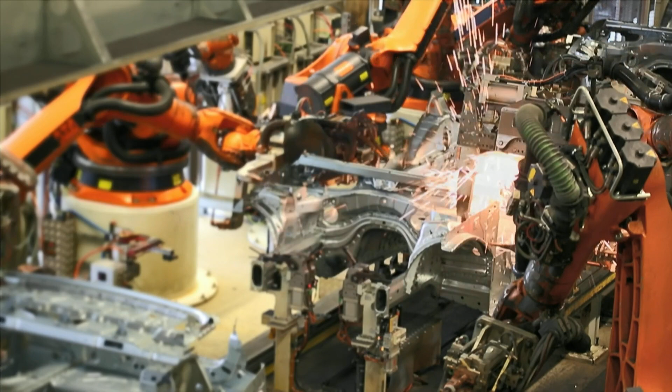We sort of know these factory robots. We've had them for a long time, and I'll talk about their beginnings. Robots in automobile factories is what the Robot Industry Association used to say robots were until fairly recently. There's only a few hundred thousand of them in the world. So these are the robots that populate factories, and there are no people next to them. They're all robots, no people, and I tried to fix that and made some progress over the last few years.

It's not actually a real baby, but that's another story. And then there's robot vacuum cleaners. iRobot has about 60% of the world market for them. But there's also military robots, and iRobot was part of that.

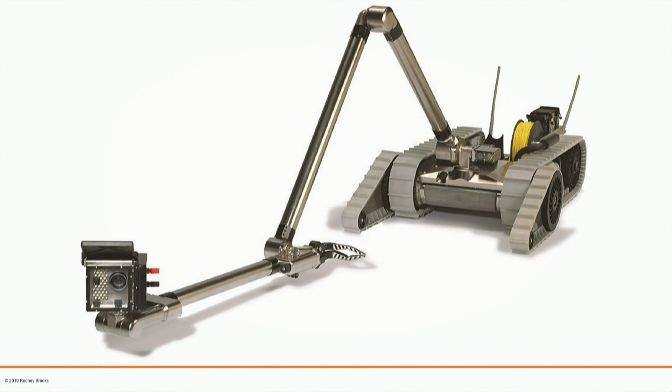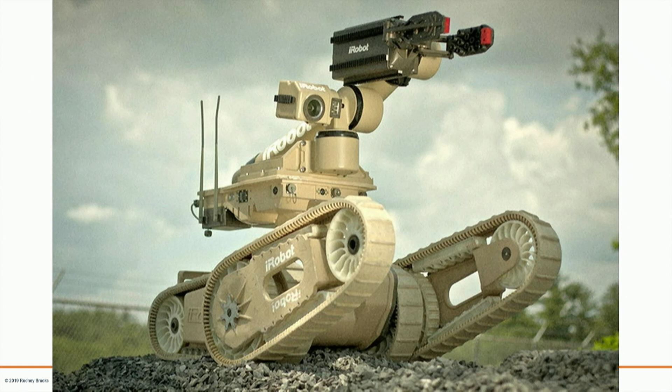We had robots in Afghanistan and Iraq doing roadside bombs. And then another one of our failed business models at iRobot was actually nuclear power plant inspection robots. We had done that in the 90s, and then on March 11th, 2011...

Sorry, I was going to talk about cars. I've lost my train of thought, I'll come back to that other story in a second.

Cars are becoming robots. Right now we have lots of sensing, and the actuation is largely via the person, via beeps telling them what to do. But self-driving cars, they're robots.

They're not going to be here as soon as everyone thinks. They're not going to be one-for-one replacements with existing cars on roads, but we will re-engineer our cities over the next 30 years and gradually introduce them. So 30 or 40 years from now, there'll be lots of self-driving individual robotic devices moving us around with re-engineered roads.

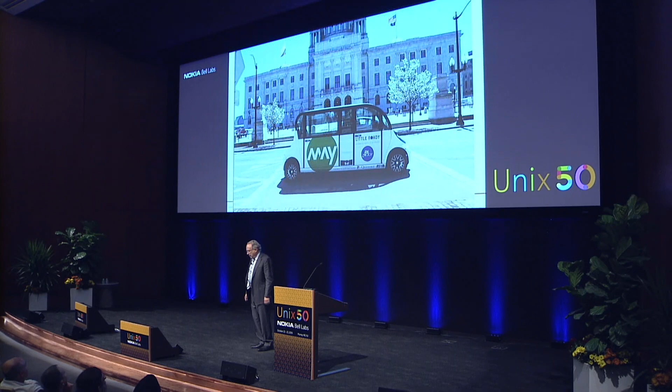This is one of the few deployments right now. This is May Mobility, deployed in a few cities, but every single deployment in the world as of today has a courtesy driver in them, in case you don't know. There's a courtesy driver.

And then the other sorts of robots that I've seen a lot of recently have been drones, and they're a special class, and I'll talk about them.

The reason I just got confused about the order in this talk, this is a brand new talk. I've never shown any of these slides before, so I'm not quite synced up.

Now, to understand what is hard about robots and why it took a long time for Unix to get to them, we have to go back to the old days, the old, old days.

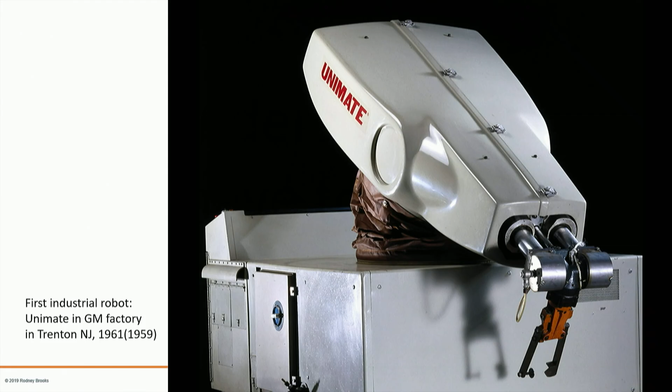So the very first industrial robots were Unimates. They were in a GM factory in Trenton, New Jersey. The first prototype, 001, was there in 1959. This is the Unimate 1900 series. I don't know how they got from 001 to the 1900 series, but they did. These started to be deployed in GM here in New Jersey in 1961.

And they were used for picking up castings, the hot things that people had to pick up. Now, this was Joe Engelberger. George Devol had the basic patent. Joe Engelberger was the business guy who made this happen.

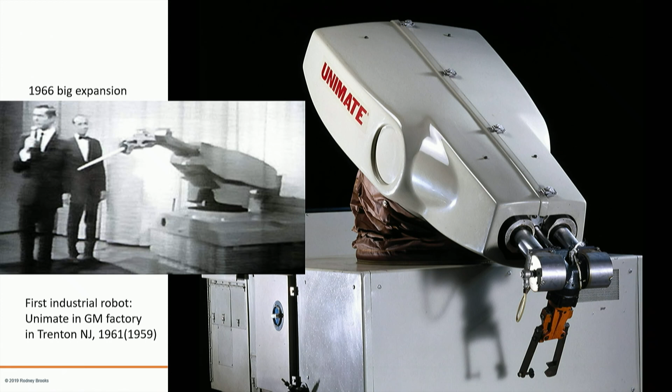And I get really annoyed with some of the press about robots today and some of the hype. Well, here's Joe with Johnny Carson in 1966, and the Unimate 1900 has a baton, and it conducted the Johnny Carson Orchestra. He also had it pour a beer, and of course it couldn't really do all this stuff, but he did that.

But by 1966 he had about 450 of these robots out there, and he wanted to go international, so this was part of his international expansion. And he went out internationally and signed up some companies that actually licensed and built them.

And Marcus, what do you think the very first company was that did this? Yes, you've probably never heard of it. No, I did. It's a little Finnish company. Oh, very... yeah, there it is. That was the very first company outside the US that licensed and built industrial robots. The second one was Kawasaki Heavy Industries. They still have Kawasaki Robotics. Showmanship works sometimes, unfortunately.

Now, that robot did not use a computer even, but I want to give you a reason why that was. And I just want to compare the PDP-7, which was from 1965.

$72,000 for the PDP-7. There were only 120 of them built, it turns out. They were wire-wrapped, and that means no factory floors for you, because they would have just gotten dirt in them, shaken, and it would not have been possible.

Now, what robots needed was something much cheaper than $72,000. You weren't saving much money if you had to have a computer of that price. It needed to be mass-produced, needed to sit on the factory floor, and you needed to do more than 100,000 floating point operations per second, even for a pretty primitive robot. And I'll explain why that's true.

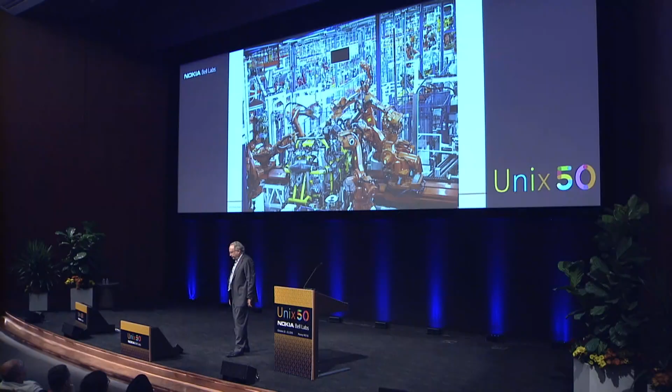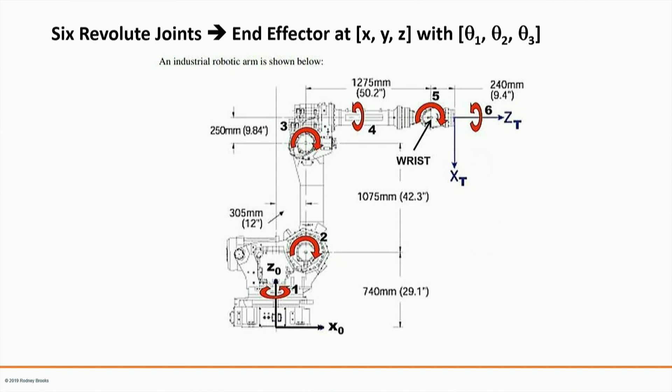And these factories, or these robots, largely have—see, I'm just not up with it—they largely have 6 axes, 6 motors. They're not in the X, Y, Z coordinate system. They're in a different coordinate system. They're just rotating joints, so you've got to get from there to where you want to be in the world.

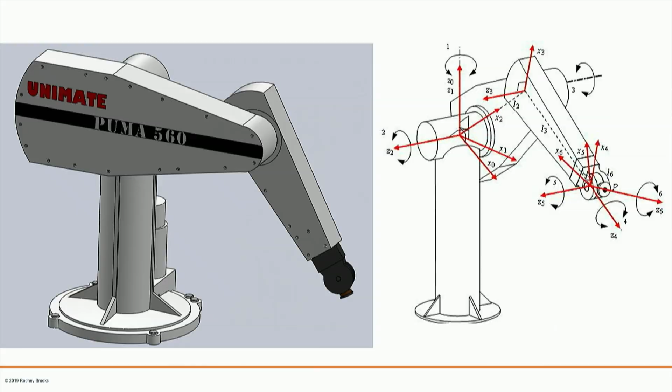And that's one sort. This is another sort—this is the Puma, which I'll come back to in a minute, a very popular version of the Unimate that eventually came from that same company that Engelberger had started, although this was developed by Vic Scheinman out at Stanford and then bought by Unimate. So this is what robot arms look like, typically 6 degrees of freedom.

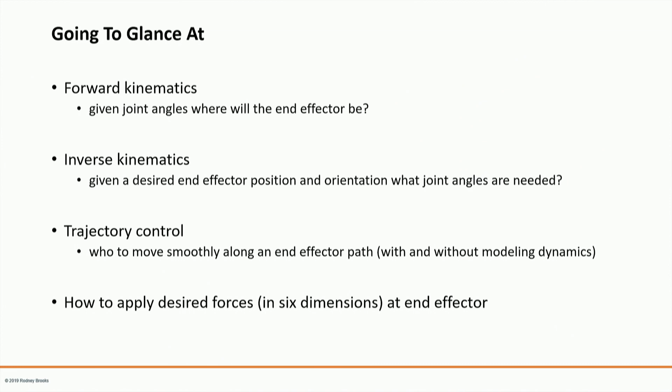And what we're going to glance at now is forward kinematics, inverse kinematics, trajectory control, and how to apply desired forces, just to show you the mathematics. But 6 dimensions is way too scary—I want to scare you with equations, but they're too scary in 6 dimensions. So I'm just going to go with 3 dimensions.

We're going to imagine a little robot that can turn in place, lift its shoulder, and bend its elbow. So I'm just going to get an X, Y, Z position for this endpoint with theta 1, theta 2, theta 3, the 3 angles. That's the forward kinematics—where I'm going to go backwards for a second.

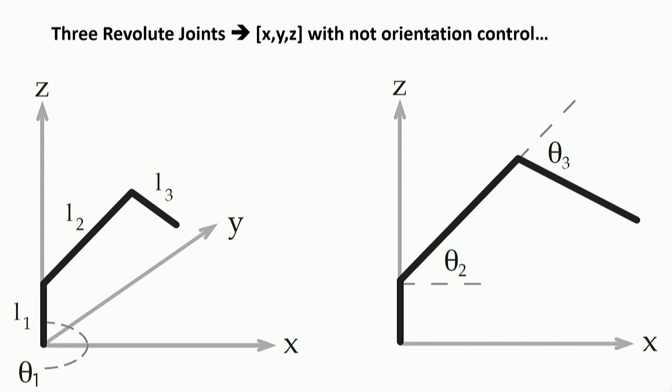The lengths L1, L2, L3 are the lengths of the links, and then going forward, C sub 2 is the cosine of theta 2, S3-minus-2 is the sine of theta 3 minus theta 2. That's just cosines and sines—a bunch of multipliers. That's the forward kinematics: if I know the angles of the arm, where's X, Y, Z?

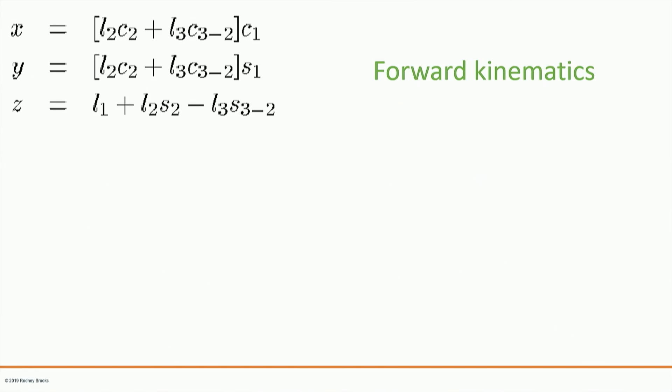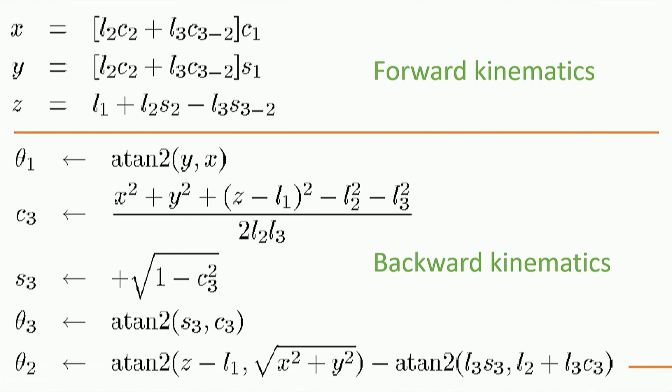If I want to go the other way, I know where I want to be—how do I compute theta 1, theta 2, and theta 3? It's a more complex computation.

Then if you want to follow a trajectory, you could just go to an XYZ, XYZ, XYZ position, but as you move between them, the joint angles will be traveling at maybe constant velocity, and you get this sort of lumpy curve.

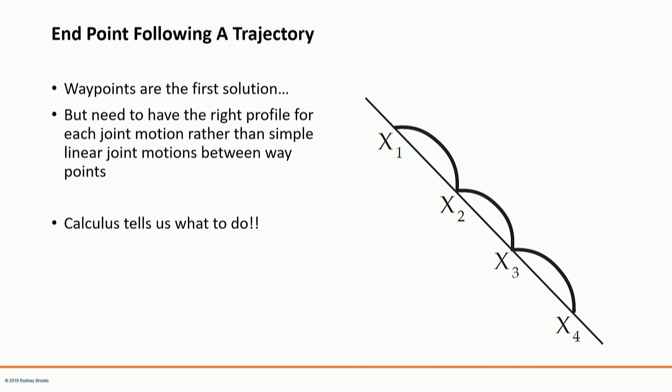And then that doesn't really control it. That just moves it to a place or moves it in a trajectory. But in fact, there's mass involved.

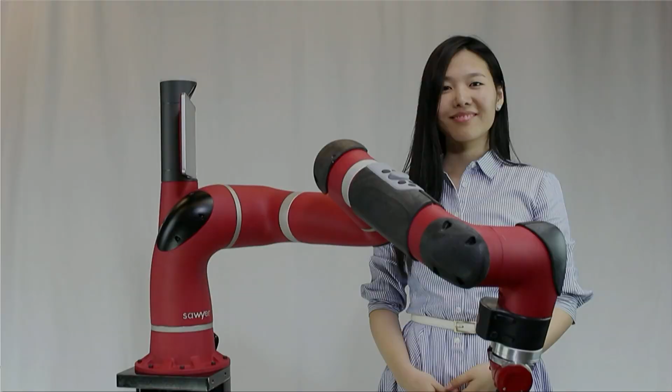So here's a video from my company. Let's start that video. This is Shiwei Wang, one of the engineers. And here we've got the robot...

...applying zero force to its endpoint in real time. So she can just touch it and move it around because it's sensing the force that she's applying, and it's trying to zero it out. So this is what you need for a robot that's going to be safe to interact with people, or do insertions, as people do to plug things in or do other tasks.

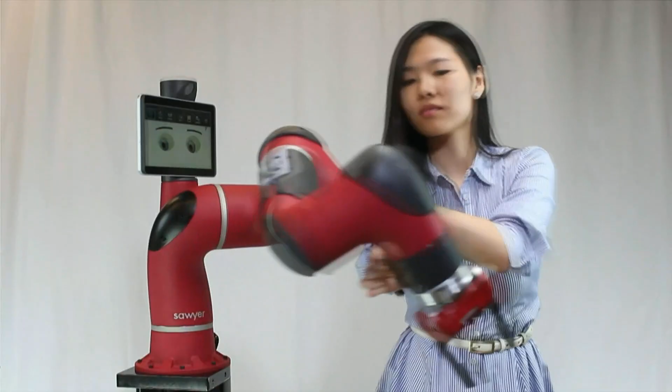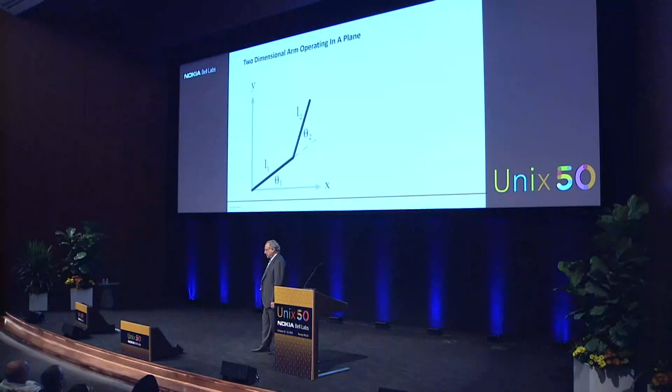That gets way harder than what I've shown you for the kinematics. Even 3 dimensions is too scary, so I'm just going to show you 2 dimensions. I'm not going to go through the details, but even the simplest version of dynamics and torque gets you way more equations, and so you've got to be computing all the time. You've got to do this about 60 times a second.

It turns out to be a lot when you multiply those by 60 times a second. So computers just weren't enough to do this for a long time. And when they were enough, you had to have a cheap one, so you couldn't waste any cycles on anything except this arithmetic. Couldn't have one of those operating systems around. It was just, so we didn't have operating systems, we just had bare metal doing these computations.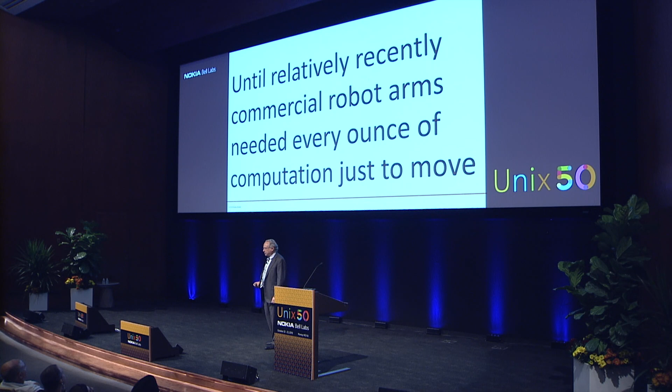And there's multiple solutions. So until relatively recently, commercial robot arms needed every ounce of computation just to move around, let alone do anything smart. And there were hard real-time constraints. You had to get those numbers there at the right time, had to do it.

So robot arm companies have used embedded processors with fixed processing loops, and still today, the vast majority of robot arms are programmed this way. They're not very interesting from a computational point of view.

But there were some early Unix heroes, and they were at Bell Labs Holmdel. I don't know if people are aware of this, I don't know if any of the authors of this paper are looking in. Bob Gaglianello and Howard Katseff. Does anyone know them? Are they here? Is that you? Is it?

So in 1986 they had this paper about a thing called Meglos, a multiprocessor operating system for real-time applications. It was a Unix on a DEC VAX with a whole bunch of Motorola 68000s. The Motorola 68000 was the processor used on the original Macintosh. I think by the time we got to Sun Microsystems, maybe it was a 68010 or a 68020, I can't quite remember.

They had low latency, 750 microsecond communication between these 68000s. So it was a 32-bit VAX. It's in the paper, it says a Unix extended kernel, and the satellites were controlled by the VAX, the 68000s. The Unix handled all the file I/O, 80 megabit per second network between them, and they used at-most-once semantics. So it was just do this, but only do it once, and that's important.

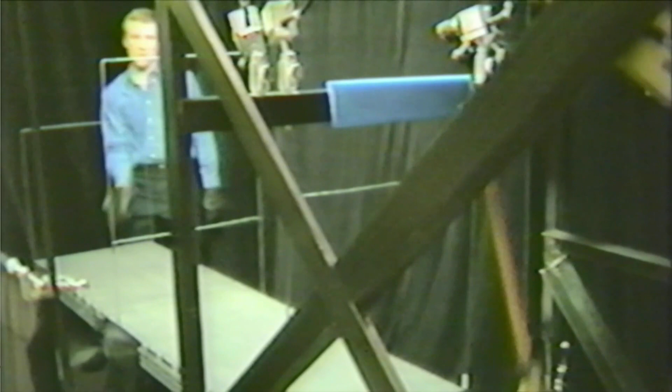So this is Russ. This is Russ himself playing ping pong. You notice he's got black gloves on so that only the ping pong ball shows up in the cameras. You see above there, you can see some stereo cameras. On the left is the custom vision hardware. On the right, I believe, is the Meglos system with the 68000s, and there's a VAX controlling them.

And this was able to play ping pong in 1987. Last year, KUKA came out and said, 'We have a robot that can play ping pong. Aren't we fantastic?' And I said, 'Well, it's 30 years late, guys.'

And in a minute, you'll see some of the images of the ping pong ball. He had to correct for where the ball was, and then from the trajectory he was estimating the spin on the ball, and then estimating how the ball would bounce once it hit the table. This was just amazing stuff that he could do.

Just a second more, I'm not real good at editing videos. So now you see the ping pong ball going, and it's showing up on the screen, the trajectories. He's predicting the bounce, and ping pong is being played by the first robot in the world that is fast enough to play against a human.

Russ's voice: Yeah, the robot was built.

So the important thing there, and this is where it leads to with Unix today on robots, is this at-most-once semantics, not trying to shake hands back and forth. Let the real-time stuff happen by itself and just give it advice occasionally. It's a really important aspect of architecture for robots today.

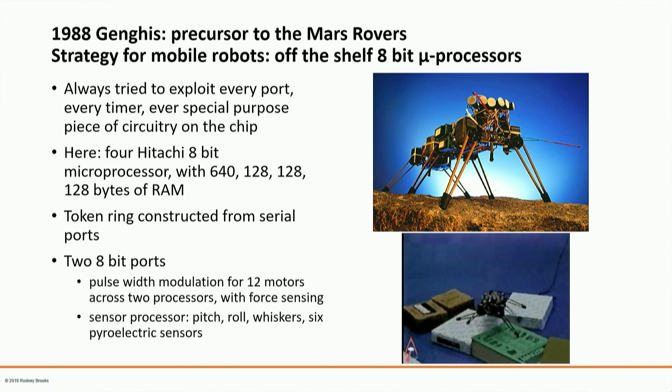I'll just show you what we could do in the 90s with that. This is, oh no, let's go back. Sorry, I didn't quite want to start. Okay, I'll tell you when to start the video.

Here we got people off the street who didn't know what was going on and told them to talk to this robot. The robot did not understand English, but it did understand the prosody in people's voices. And it didn't speak English, it spoke English phonemes and put prosody into them. So then we'd watch people interact with the robot.

So now let's run this. This is Richie. Yeah, let's run this.

Dude, I want to show you something. This is a watch that my girlfriend gave me. It's doing motion detection. Yeah, it's according to the motion. So like, he thinks it understands.

It doesn't understand, but I liken this conversation to being in a bar at 2 a.m. You're both sort of talking, you don't really know what's going on, neither side. It's not real communication, but it sort of feels like it. Anyway, that's what we were doing then.

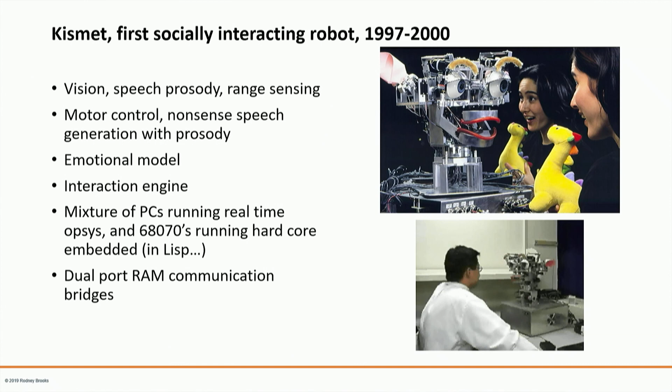It doesn't know that it's a crank, but it feels that there's something there, and it gets into a rhythmic vibration. Then he comes and adds masses to the arm, and that completely changes the dynamics, and it adapts to that. This is the work of a lot of people, and it was pretty hard to do.

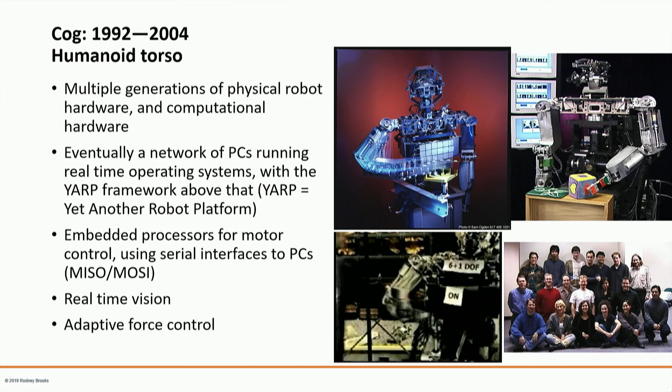But we were starting to have, by then, frameworks for robotics. In my lab, we had one called YARP—not yet another compiler, but yet another robot platform. Thank you for that idea of how to call them. People were starting to have software platforms for robotics, but built on real-time operating systems still. Things like RTX, VRTX, and Nucleus RTOS—real-time operating system, which is POSIX compatible, but a real-time version built commercially.

By that time we had two classes of processors, as computation was getting cheaper. We had small embedded processors for real-time motor and sensor control, and a master processor running a real-time operating system for high-level processes and communication between them. It was a bit like Meglos, developed here at Bell Labs, but still a real-time kernel. Outside the labs, though, we didn't have that at all.

Toys and consumer robots were driven by low price, so there was almost no computation that you could afford to put in a consumer robot. It was really hardcore embedded.

One of the things I contributed to these sorts of robots—I was always in Asia with my job with MIT, talking to people for research, and I would go off on little side trips to Hsinchu in Taiwan, where TSMC, Taiwan Semiconductor Manufacturing Company, is, with lots of little companies using that fab facility. I'd go from company to company, find out what processors, little tiny cheap processors they had, and figure out whether they were good enough for what we wanted to do.

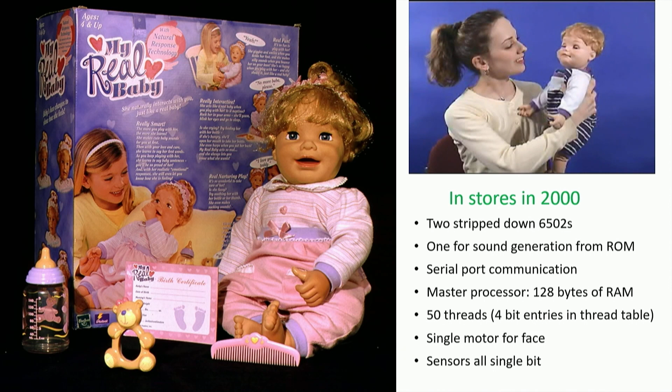My Real Baby, and she's sleeping right now, but I'll pick her up. One motor to drive the face. People thought it was a little bit like Chucky. You can play with her—she faked laughed. And sensors on its foot. It had peeing, and we had to change its diaper and stuff like that. It was a failed business model. You're really ticklish.

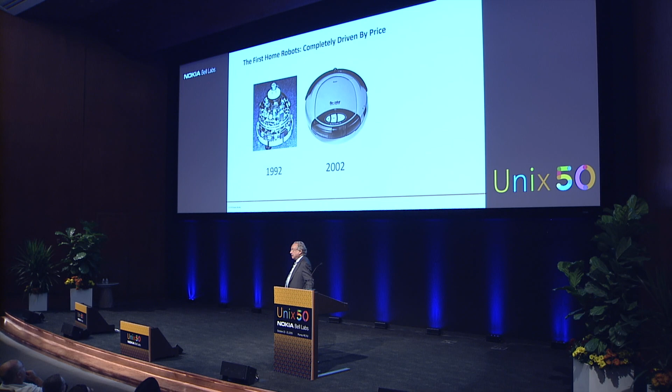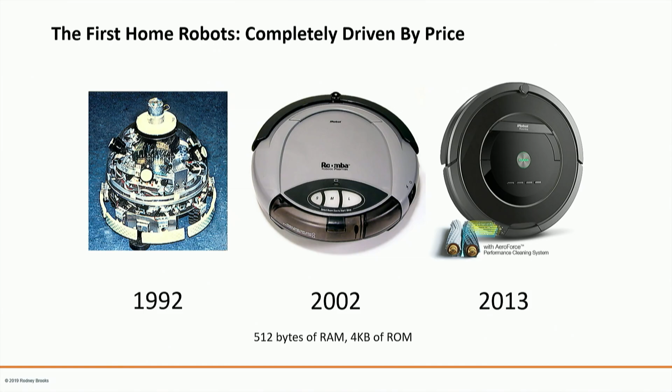We had gone around and asked people how much they could spend without their spouse getting really angry at them, and the answer was $200—so that's what we came out with, which meant we had almost no budget. Cost of goods sold was about $50, so we had almost no budget for computation, and it took a long time to become useful as robots. But we brought it out in 2002, and I had found a chip with 512 bytes of RAM that we could afford—that was luxury, I tell you. It was just great. That was what commercial was doing, even as late as 2002. You could hardly afford any computation, which is hard to imagine, but that was the reality of embedded systems. RAM was really expensive still on a single chip at that point.

But today, millions of robots run a version of Unix. How did that happen? How did we get from there, back in 2002, to here today? It's been quite a change just in the last decade and a half.

A lot of people say, is it ROS, the Robot Operating System? ROS is very popular, but there's some things to know about it. The big thing to know is it's not an operating system, it's a layer of libraries. This is what ROS actually says on their homepage: it's a set of software libraries and tools that help you build robot applications, from drivers to powerful developer tools, etc. And it's all open source.

And in the robot lab yesterday in the tour, those robots were running ROS. The students are using ROS. It's become very popular. First it became popular in academia, and now it's trickling out into real-world applications.

But the second thing to know about ROS is it's not even close to being the first such framework. It's the winning framework, but it wasn't the first one by any means. There were lots of them over time.

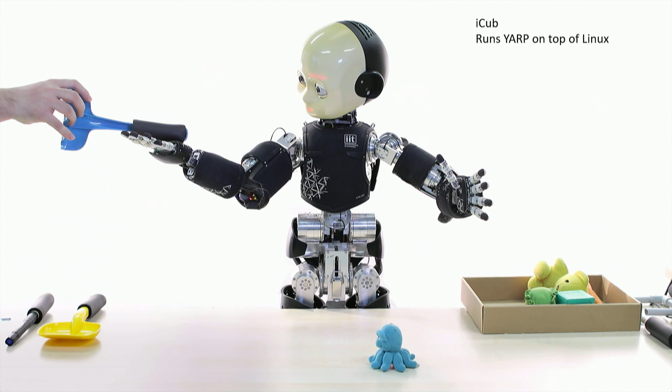with the iCub. I just looked on GitHub, the latest version of this came out just a month ago. There have been patches in the last month. So there are other active platforms.

But all of them, pretty much these days, run on top of Unix, usually Ubuntu is what they run on. So they're starting to be Unix-based robots.

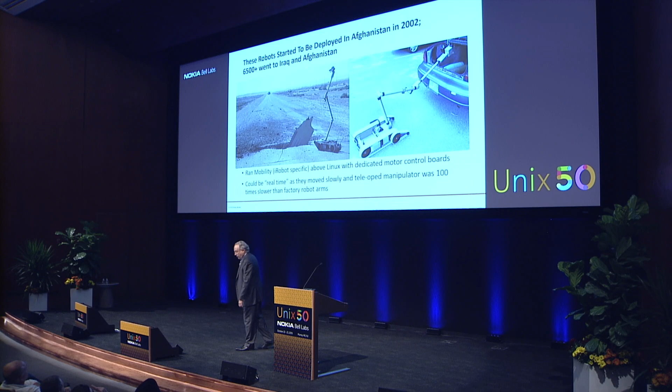And this is that earlier part of the talk. Here's what I'm most proud of in my life. We had these robots that were used in Afghanistan and Iraq, and the pride will come in a second. The particular framework we used on them was called Mobility, ran above Linux, dedicated motor control boards. And we could do that early, back in 2002, 2003, for two reasons. One, they were military robots, so they could be expensive, relatively speaking, to consumer robots.

And the arm was teleoperated and moved 100 times slower than in a factory, so we didn't need as much computation in real time.

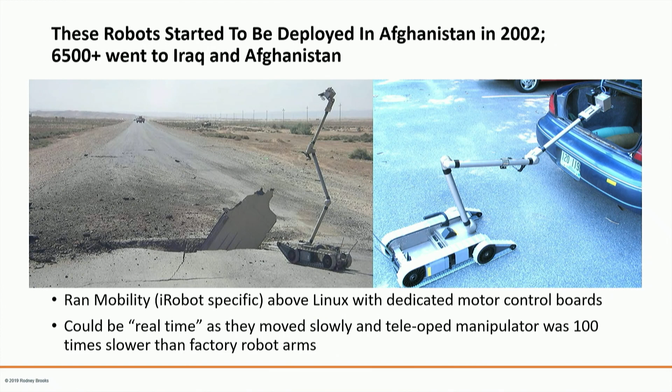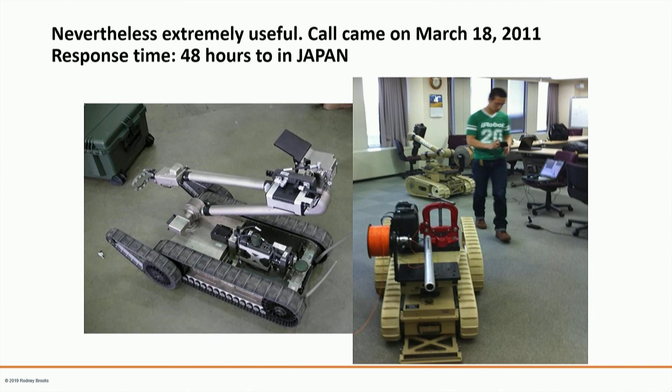One of our failed business models at iRobot had been nuclear power plant inspection robots. It failed in the mid-90s, but then on March 18th, 2011, 7 days after the great tsunami, we got a call: can you get robots into Japan, into Fukushima? We trained up TEPCO, Tokyo Electric Power Company, and then we had robots in the power plant shutting it down, because it was a

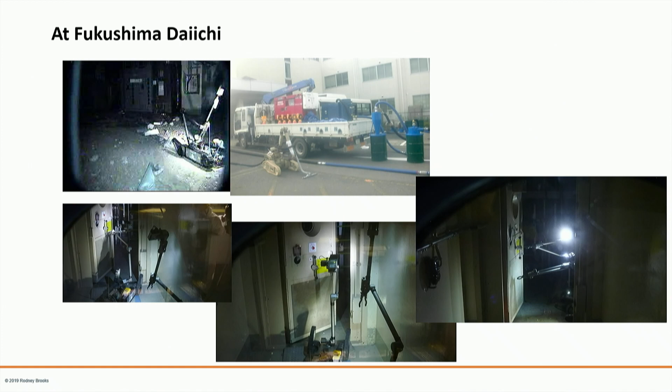totally analog power plant system, no digital controls. It was a 40-year-old GE power plant. There were just dials, and no one could get out to see what was in the dials. No one could see what the pressure was in those buildings.

So we had multiple of these robots go off and make Wi-Fi hotspots and get digital out into the high radiation areas, then put a camera on a pressure dial and feed that back so that people then had some information on what was going on. Then the robots were able to operate certain things out there under teleop control and shut down the power plant.

I went to Fukushima three years later. That was a very sobering day for me to go into Fukushima. It's quite a thing. Don't build power plants without digital channels, and don't build them where there's going to be a tsunami.

A lot of lessons. But now, despite different versions, ROS is really ascendant. It's still not an operating system, still runs on Ubuntu mostly, but it's the system of choice for research labs everywhere. There are still some research groups running other legacy systems, but a lot of autonomous driving systems are now relying on ROS because they came out of universities which were using ROS.

And ROS is also penetrating the industrial robot market and the high-end consumer market. And let me show you, running on Linux: here's Universal Robots, a Danish company now owned by Teradyne in Boston, which is one of the fastest growing industrial robot companies. It runs Unix with ROS sitting on top of it.

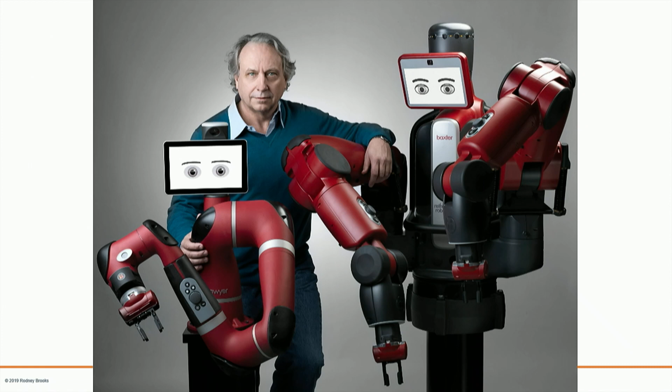My own company, which ended up failing, we ran ROS on Ubuntu. And no, we don't need the music.

Total artistic success, this company, commercial failure, although just on Monday, the people who bought the assets announced a new model of our robot coming out. This is Sawyer. They announced Sawyer Black, so I think they're going to paint it black instead of red. It's built in Germany.

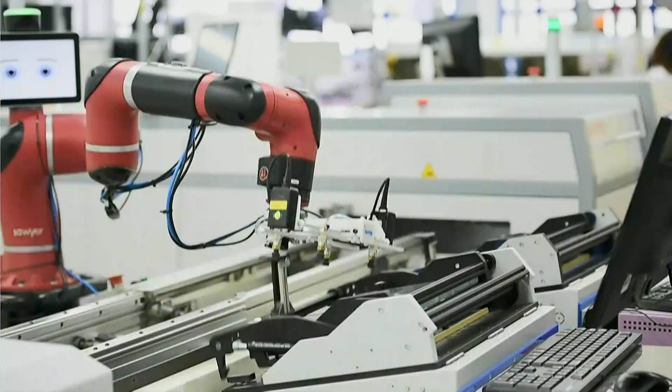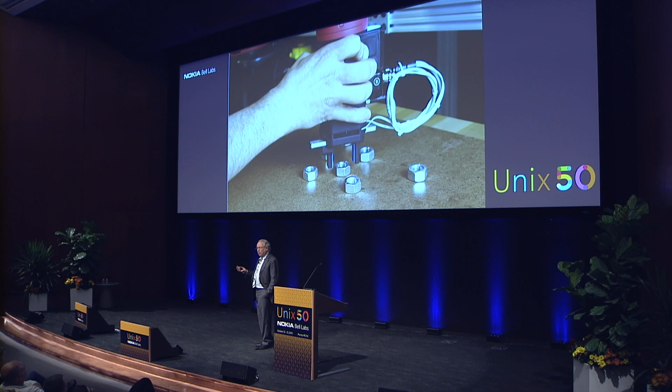But this was a sort of force-controlled thing that our robots were doing. And then a complete rethink of how you program robots, instead of writing essentially scripts in a version of Pascal, which is how a lot of commercial robots are programmed. We did teach by demonstration, which builds automatically a behavior tree.

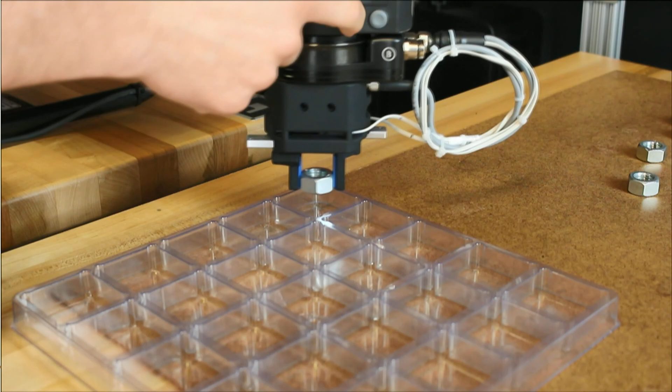Behavior trees are what run video games. So we thought, well, there's a lot of people who know how to program behavior trees. This is a good thing to use to program robots.

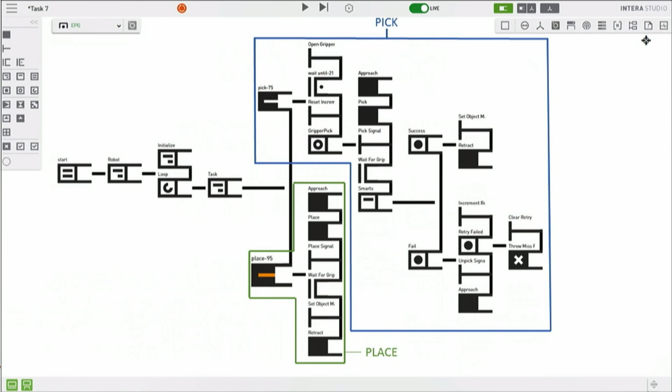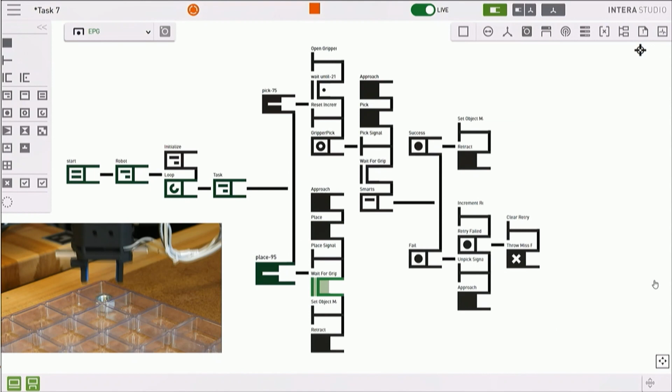This was a marketing video from Rethink Robotics before it crashed, showing the trees that automatically get built. Along the way here, you'll see that we could control not only our own robots, but lots of other company robots, including some of the commercial robots that were out there.

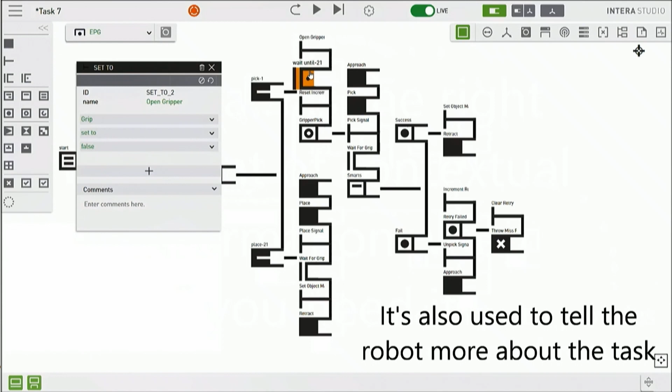In particular, somewhere you'll see KUKA robots being controlled by our system, which used to run these embedded hardcore systems. We just got them to run under ROS running on Linux. Anyway, it's a modern user interface, using Node.js and all the JavaScript sorts of things that you use for a modern user interface.

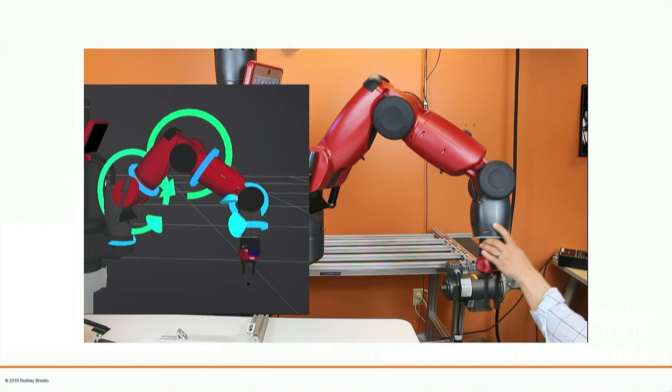I'm going to skip over that. But one of the important things was we're able to sense forces in real time. This is something you couldn't do at all before. You can see the circles showing how big the force is on each of the joints.

The ones that are just rotary here don't have much force because they don't have to compensate for gravity. The big one at the top has to hold up the arm, so it's fighting gravity there, which is why there's so much force on it.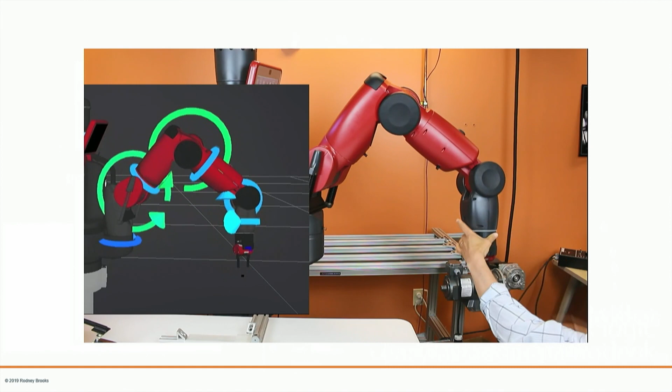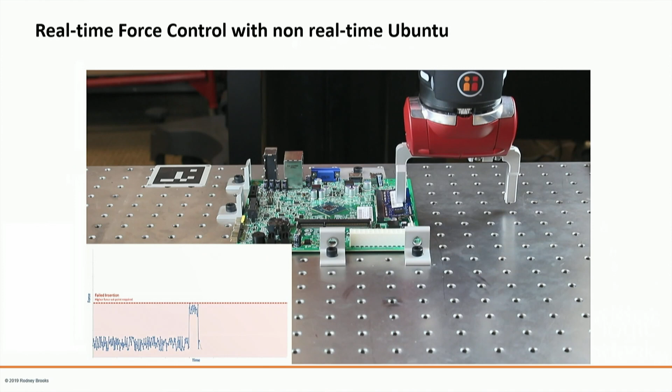These could be used to do all sorts of things the way people would do them. If you just had a robot trying to do things by position, it had to be so precise, but by feeling forces, going until you feel the force, and then twisting and pushing, that's how a human would put that memory module in. There it's trying to click it in, but it didn't have enough force, it failed, so it can measure when it's failing. Now you'll see it do it correctly, feel the force as it clicks, and all is good.

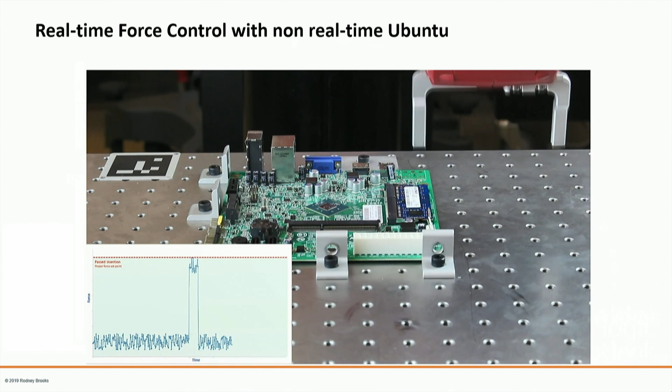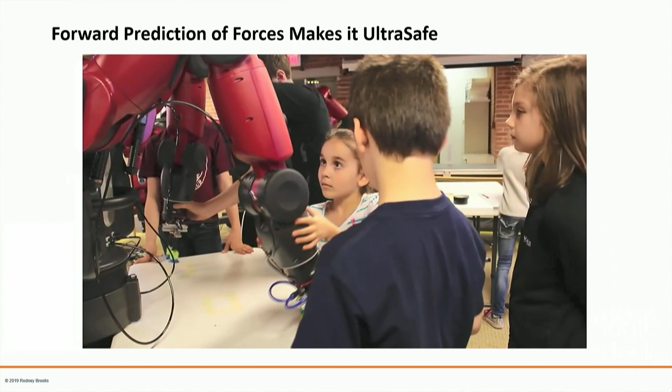And totally safe for kids, even. This was just bringing kids into our company, and we didn't show them how to program the robot. They all figured it out just by looking, they knew how to use a modern user interface, and pretty soon had the robot doing things, but safe to interact with.

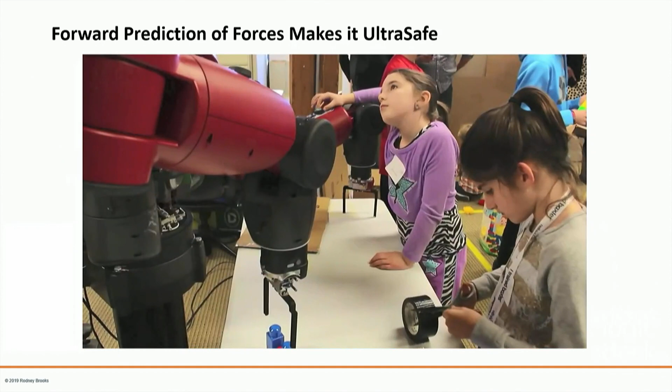Now, why can we do this today when Ubuntu is not real time? Ubuntu doesn't give real time guarantees. So what we do, and what all the companies do, is we make use of multi-core, and we lock certain threads down on a particular core. It's not real time guaranteed, but it's good enough.

So you run maybe a 200 hertz loop doing the dynamics and trajectory planning, all those floating point computations you saw before, in that thread on that core, and let the rest of the stuff happen on other cores. There's no real-time guarantee, but there's real-time comfort on that core.

Don't worry, this is what your life is going to be like. You're going to, especially when you get older, these are the robots that are going to be getting you into and out of bed. It's fine, really.

Then you have position and force control loops running at embedded processors right next to the motors at 1 kilohertz or 2 kilohertz. And these days, you even do the commutation of the brushless DC motors and determine the current at 30 kilohertz. As the motor is turning, you change the current in the coils, so you have a 30 kilohertz loop running down in these embedded processors.

So that's how we separate out the real time from the non-real time, and it's sort of a cheat, but everyone's doing it, and it's good enough. It looks a lot like Meglos from 1987, but with this multi-core twist.

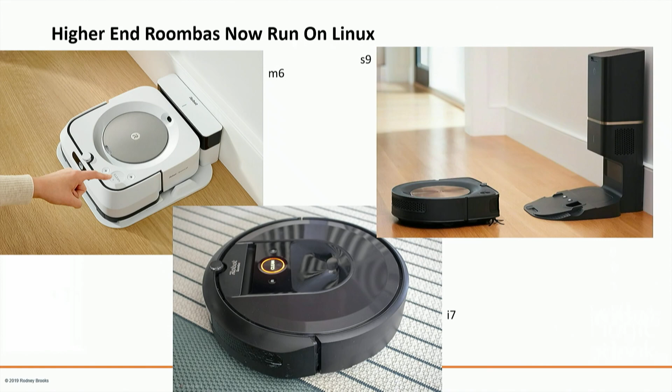And that is why Unix is now becoming the drug of choice for robots. The higher-end Roombas now all run on Linux. We used to have simple model names. Now the M6, the S9, and the i7 all run a version of Linux. They're on 32-bit ARM processors now, so there's enough oomph there to do stuff with multi-core.

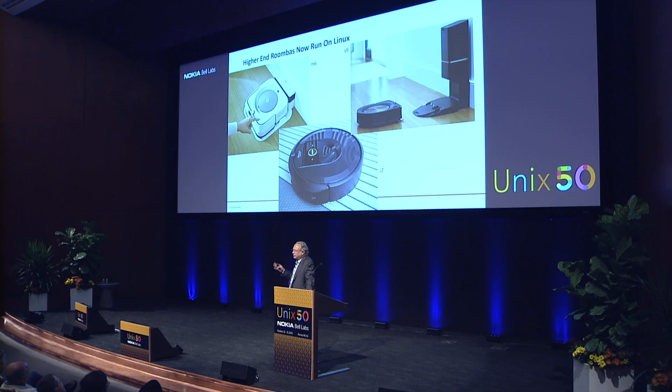Everything's got more complex, vacuuming used to be easy. I like to say, I started off life with a degree in pure mathematics, and I ended up as a vacuum cleaner salesman. Who knows how life's going to turn out?

And then most of the self-driving cars will run Linux with ROS. That's just going to be that future.

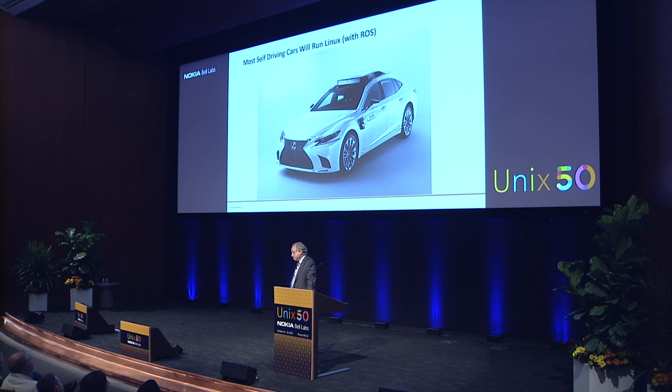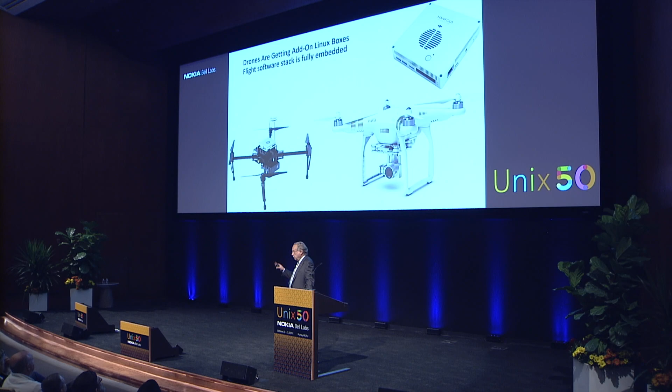Now, drones, on the other hand, have a lot of mass and power requirements. So what's happening is the flight software stack is still running fully embedded, and then you can buy these add-on little Unix boxes, which people with particular applications want to do some simultaneous localization and mapping with vision, etc, put on their drones. Because of battery life, some people don't want them on, some people do. So that's an option, and the stuff you buy initially doesn't have Unix running on it.

So low cost, low power, and ultra high performance applications are going to be resistant to Unix, but most of the world can be sort of shoehorned into running on it. And that's why I say tomorrow, most of our robots will be running Unix, and everything's going to be great. So thank you, guys.